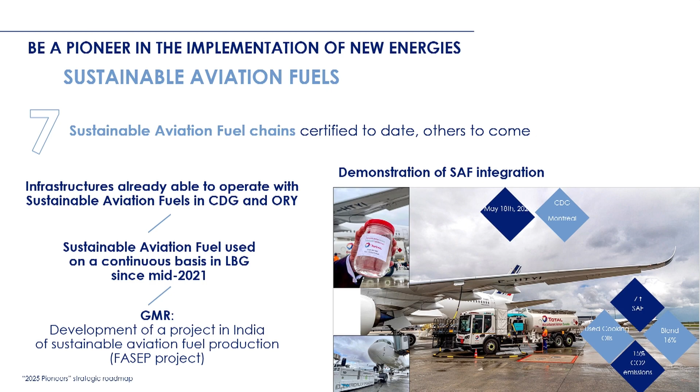In Le Bourget, we have installed several storages for SAF to supply our business jets. And once again, the airport has a role to play next to a SAF producer to secure or to foster the development of SAF, because we know it won't be so easy to have the amount of SAF required.

So GMR in India, since we're also implemented in India, just like Aéroport de Paris, we have developed a project of sustainable aviation fuel production, and Aéroport de Paris is also thinking about the role the airport has to play in the SAF value chain, to secure the production of SAF and to make sure that the amount of SAF produced will also be dedicated to our airport.

And in the Olga project mentioned by Mikko in the introduction, we are partnering with Air France, and we have experimented a flight with 16% blend of SAF in 2021 for a flight traveling to Montreal. On SAF, our role is really to be part of the value chain to foster the development of SAF.

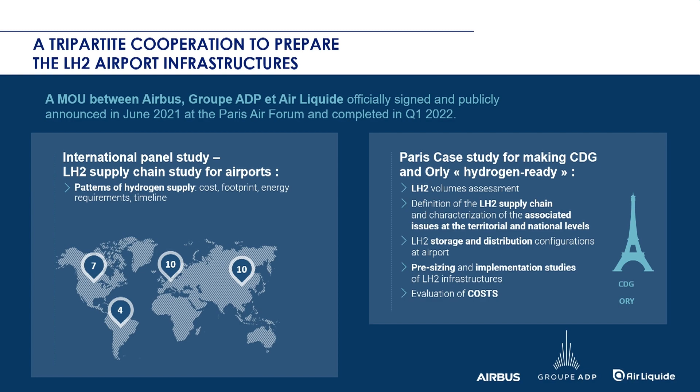With Airbus and Air Liquide, we led a cooperation to study what could be the hydrogen supply chain for 30 airports around the world, and also studied how to make CDG and Orly hydrogen ready. We carried out a master plan study, assessing the LH2 volume required, the possible supply chain, the way to store and distribute hydrogen, and also the cost.

Thanks to this study, we learned many interesting things. Maybe one of the most interesting at a European level is that the price of hydrogen will mostly depend on the price of electricity, whereas today the price of kerosene is quite the same all around the world. The price of hydrogen, because of the price of electricity, will vary a lot between countries.

So it could bring also a kind of unfair situation - the level playing field won't be the same anymore. The price of hydrogen will become a lever of competitiveness of airports. That's why airports should also tackle the subject by thinking about how they could play a role in the value chain of hydrogen, to be sure to have enough hydrogen, but also to have it at the lowest price possible, because it will be a lever of competitiveness.

During our study with Airbus and Air Liquide, we also studied how to implement hydrogen infrastructures on airports, and there will be several phases. The first phase, between 2035 - the entry into service of zero emission aircraft - and 2040, the supply chain will mostly rely on trucks.

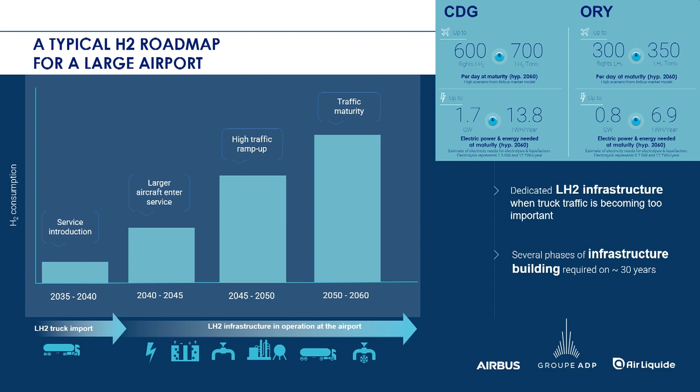There will be hydrogen farms or hydrogen producing farms located away from the airport, and trucks will supply the aircraft between these farms and the airport. As of 2040, we think liquefiers and hydrogen storage will be necessary at the airport, and the ramp up will follow progressively the penetration of hydrogen aircraft.

To distribute this hydrogen to airports, there will be two main possibilities, just like today with kerosene: the first is with trucks, and the second is with cryogenic pipelines. Just to give you an overview, for CDG and Orly, in one of the most optimistic scenarios, it could represent up to 700 tons of hydrogen per day required for Charles de Gaulle, which is enormous, and 350 tons of hydrogen per day in Orly.

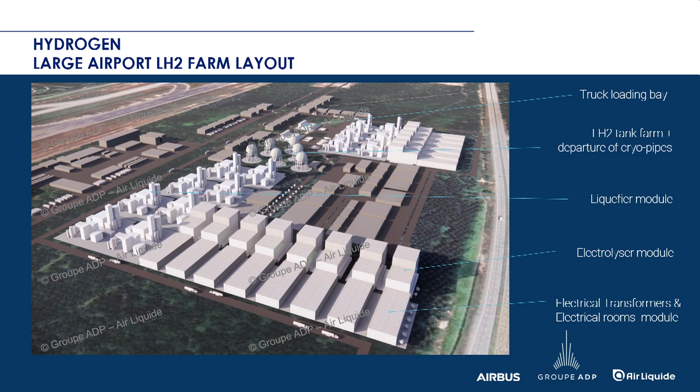And because we love master plans as an airport operator, we also tried to design a large airport hydrogen fuel farm, just to have an overview of what it could consist of. For big airports, it would require up to 20 hectares to implement hydrogen infrastructure, including liquefier storage, part of production, and a module to distribute hydrogen to the aircraft.

Here I presented the subject under the infrastructure angle, but we have also started to tackle it under a regulatory angle with Airbus. We really try to understand how hydrogen aircraft will impact actual regulation. We study all the aircraft process from landing to takeoff, and it's not so easy to define exactly what the change could be and how to tackle it from a regulatory point of view.

But we know that one of the keys to success for hydrogen will be to be ready in terms of regulation at airports, and we also know that we will need standards across Europe and all around the world about how to cope with new aircraft from a regulation point of view.

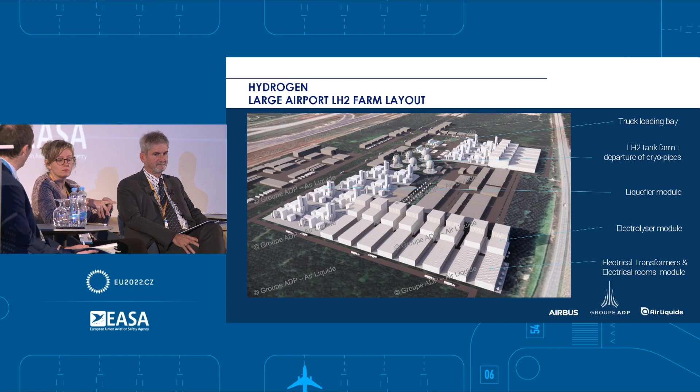Thank you, Blandine. Yeah, that's clear. So it's also encouraging to see that Group ADP is looking at short-term solutions with SAF, but really looking very detailed at hydrogen. And yeah, you were referring to the cooperation with Airbus, and that brings me to the next question, Peter.

Airbus is very ambitious, so by 2035, Airbus would like to bring to reality a hydrogen-powered aircraft. So yeah, of course, this is something you cannot do alone, and collaboration with airports is extremely necessary, as we just heard from Blandine.

But in general, how is Airbus getting ready for this in terms of your hydrogen plans, and what are you doing in collaboration to really achieve that point?

Okay, thank you very much, Dietmar. Really thank you for having this opportunity to share with you the challenges we have with this. It's always easier to climb a mountain together than to try to do it alone.

But before going to the challenges, I would like to spend one minute on the ZEROe project, because not everybody may know what this is all about. It is a project in Airbus we launched two years ago.

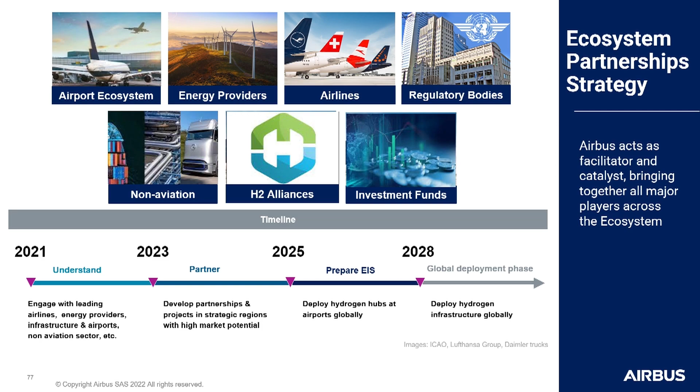And the objective is to build together a roadmap so that we can bring the introduction of hydrogen to a successful situation. This is very much linked to the time we introduce the aircraft, but also how much the network is going to develop. So it's really an interaction between the aircraft manufacturer, the operators, and the airport to find out how the traffic of hydrogen aircraft is going to develop on my airport.

So it's really detailed work which you have to do with each airport. I think, well, you see here the main stakeholders, and as we are in an EASA conference, I think we should spend a little bit more time on the regulatory side. Blandine, you already mentioned this is a big challenge. There is not much in terms of regulatory today existing.

And we have the situation where we're not only looking at aviation regulation, which is typically what we deal with, but as we are now with an airport, we need to look at the supply of hydrogen to the airport. We're looking at all the regulation also on the civil side.

So we started from the bottom. We set up in France a working group where, together with all the stakeholders, the regulators, aviation and civil, we started to look at what kind of new risks we are introducing with this kind of hydrogen operation. And we have set up a matrix for that. It's just the first step. The next steps will be how are we going to mitigate those risks.

And following this, I think we can come up with the right recommendations and regulations to make sure that those risks are well managed in the world.

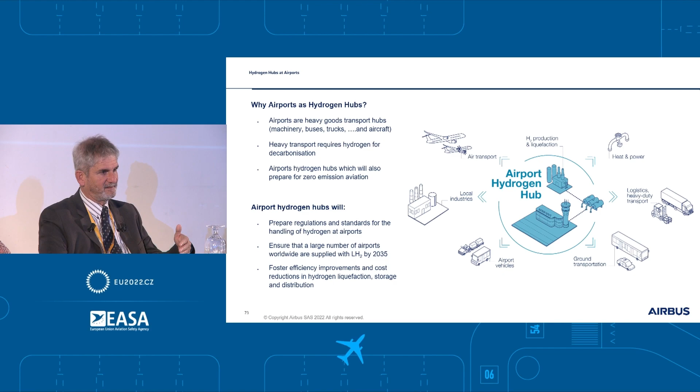And at a certain point in time, you will see that it is more efficient to supply liquid hydrogen to an airport and store it, even if you have only gaseous users. And we believe with this kind of development of users, we will be in time in 2035 to have liquid hydrogen actually available on the airport.

So this is how we are planning, together with all the stakeholders, to get the world ready by the time we come with these aircraft.

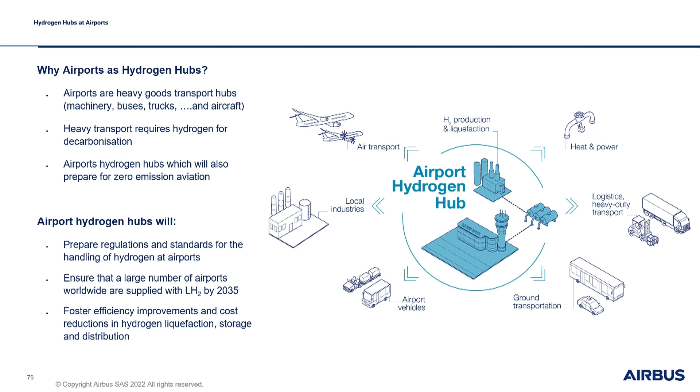Thank you, Peter. It's really challenging. 2035 — it seems like a long way, but it's not. Well, regulatory-wise, we all know it takes a lot of time to get the right regulation on the table. Which is why we are here today, and why we should indeed talk about that. You're right. So thank you.

Mikko, maybe — we talked a bit now about SAF and hydrogen and what airports can do, but let's take a step back and look at what airports themselves can do. This is also important. What is your view on how Finavia is approaching net zero carbon emissions from its own operations, and how does Finavia tackle that?

Yes, thank you. Indeed, we have a roadmap for net zero carbon in place, but let's first have a look at the airport network we have in Finland. It's a big country, with 20 airports run under one company.

Distance from Helsinki to Ivalo is 1 hour and 40 minutes. My flight from Helsinki here took something like 2 hours, so that gives an understanding of the distances in the north. You can guess that many of these airports are very small, only 2 flights a day. Well, in Lapland, much more, and Helsinki was plus 20 million before the pandemic.

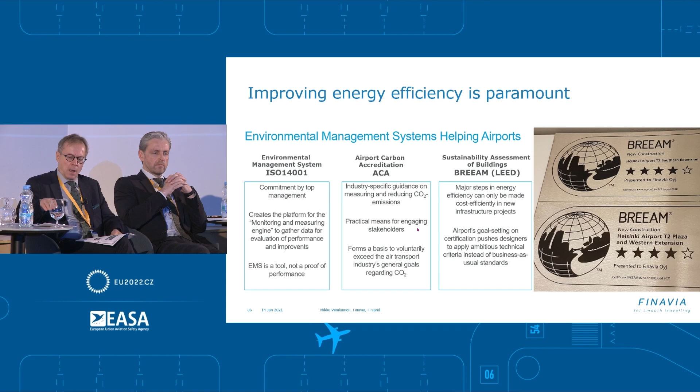Then we have reached in the ACA program, which has helped us a lot, level 4 plus in Helsinki airport and in Lapland airports. And we can say that at the moment we are carbon neutral, but that is not the goal. The goal is to be net zero carbon. But what do we need to do to reach that? Well, as said, get rid of fossil energy.

Vehicles and machinery will switch to renewables only if they run on piston engines. But before that, we electrify all the lighter vehicles. That is possible. But the big snow machines, you never make them run on batteries. They just can't cope with the power demand.

We have the opportunity to use renewable vehicle fuels provided by the oil company called Neste, whose representative sits here but talks about SAF today. We have the opportunity to distribute renewables to all of our airports throughout Finland. Heating goes to geothermal power, or we get, if that is not available, green thermal energy from the district heating systems,

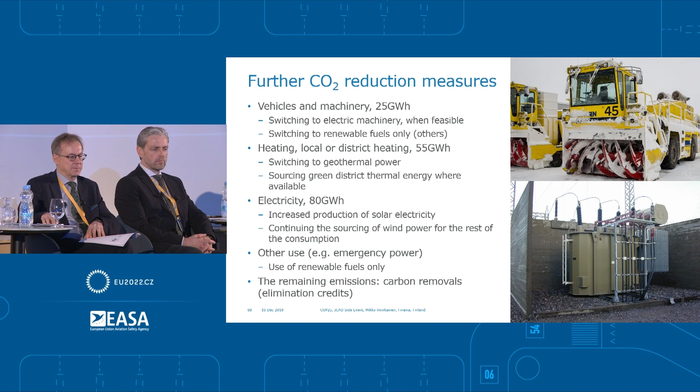which basically heat all the major airports and cities in Finland. They are turning green at a very fast pace. Electricity, we produce some solar electricity already ourselves today, but basically we continue sourcing all the electricity as green wind power also in the future. And all fuels we use will go to renewables bit by bit. We estimated that in 3 years' time we will have less than 200 tons of carbon

CO2 left, and that we will then eliminate with elimination credits and carbon capture and storage projects. So bit by bit, in 3 years, starting next year, we will implement these measures I just listed, and by the end of 2025, we wish to have airport carbon accreditation scheme level 5 for the full airport network, certifying that we have reached the status of a zero carbon airport operator. Thank you.

So, we talked about zero emissions by 2050. Airports themselves will also have a very important role, and I think you clearly showed how Finavia is already very committed to that by having net zero emissions very soon.

So, Jan Petter, you work for the Norwegian CAA. Norway is also a country which may have interesting climate conditions and settings to facilitate maybe electric flights, hydrogen flights. But you also see it as important in Norway to collaborate. So what is your view on that collaboration in order to facilitate those energy sources at Norwegian airports or airports in general? Also, as Norway is an EASA member state, what is the role of the member state in this process of getting those airports ready for those renewable energy sources?

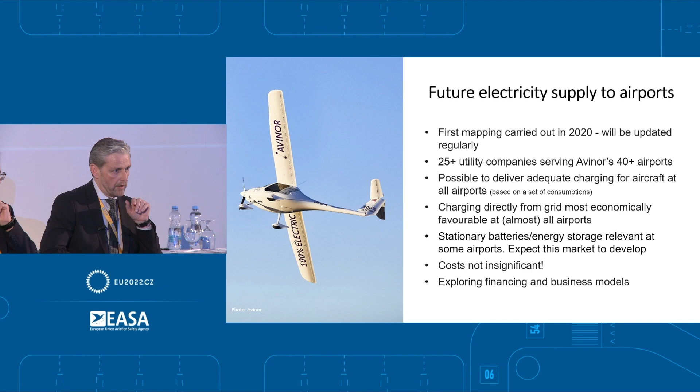Now, another interesting find is that in Norway we've been subsidizing electric cars quite heavily, so now we've passed this critical point. Today, 80% of all new cars are electrical. I think to a Norwegian family it's inconceivable to buy a fossil car for a normal family unless they have very specific needs, because now the range of the car is going far enough.

So actually, the situation at airports today is that all these cars wanting to charge, including rental cars, are maybe the biggest load factor right now. And of course, when you put aircraft on top of that for charging, that's the total sum of it. I expect this electric car development to proceed within Europe as well.

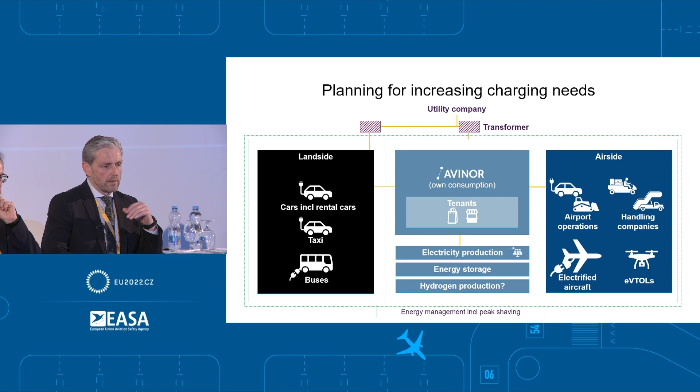They're also looking at energy storage needs on the airport. I'll show you a map shortly about hydrogen production. It could be an issue to produce hydrogen on the airport itself, since airports are often co-located with ship ports. And on the air side, there will be different utilities and eVTOLs needing charging.

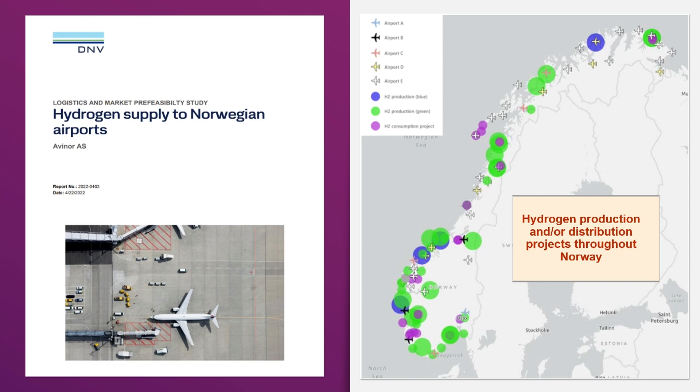So you talked about hydrogen, access to hydrogen. This is a report made just recently showing some of the network of hydrogen production. But there's a lot of work to be done to actually get this in use and also have the infrastructure on the airports.

Two words on SAF. Avinor, as a supplier or the airport owner, has supplied biofuels since 2014. We also see now that e-fuel production is being ramped up in Norway, very early stage, because I think e-fuel production efficiency needs to improve quite a lot. And then, of course, rather large advanced biojet fuel factories as well.

Now the last slide I have is this point you mentioned, Dietmar, on being an EASA member state. The first is about the safe development and integration of technology. I think we need to collaborate—not just EASA and one state, but several states—to see how we can support both the safe development and the integration of the technology. So that's one thing we need to collaborate on.

The other is actually providing guidance, providing basic aviation understanding and insights to all these new players in aviation—whether it's politicians, whether it's the energy sector not quite understanding what is happening, or whether it's startups with brilliant new ideas but they maybe spend two or three years before they actually understand aviation.

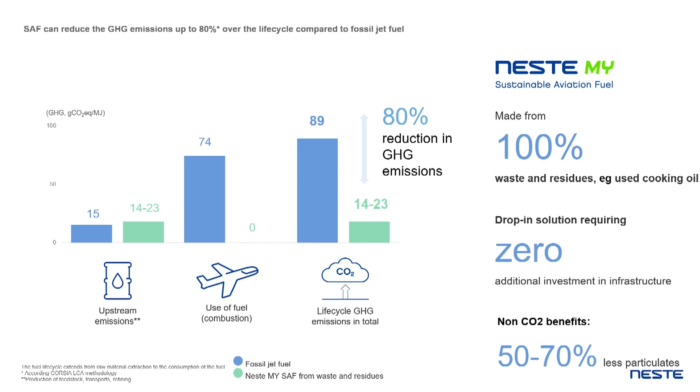There's more research being undertaken with organizations like Airbus to prove this out further. But in fact, the climate change benefit is probably underestimated because of these reduced particulate emissions, which have not only a benefit from a non-CO2 point of view, but also in other emissions around the airport.

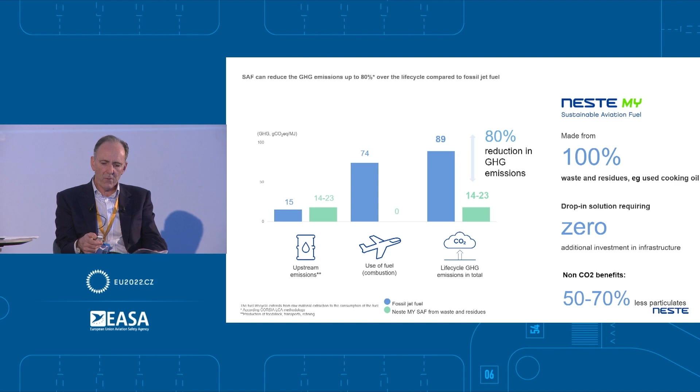And so, in effect, what we're doing, because we're recycling carbon that's in the ecosystem, we've got, as this graph shows, about an 80% reduction using CORSIA methodology versus the fossil fuel option. So there you see it visually, in case you didn't believe the research and stats on this.

And as I said, this is a drop-in solution that can be brought to the airports without any change to infrastructure. Yes, there's a huge investment in sourcing the raw materials, which is not easy. It's much easier, quite frankly, to dig a whacking great big hole in the ground and have hundreds of thousands of gallons pouring out. Here we have to source it from a very fragmented supply system, but that's quite costly. Then there's the investment in production facilities, and then we bring it together with fossil fuel into a blending and storage terminal, because right now it's only approved up to a 50% blend.

But as I say, I'm confident that we'll get to a stage where it's accepted up to 100%. From those blending and storage terminals, we then bring it to the airport into the refuelers and hydrants, so no change required. There's a rigorous certification and verification process, so we can track and it's audited what raw materials we've used, and hence what carbon saving we're achieving versus the fossil fuel equivalent.

The point to make here is you don't need to have blending at the airport, and quite frankly many airports don't have the space, especially the larger commercial airports. It's quite costly to have dedicated tanks. So what we do is blend it and then recertify it as Jet A1, and put it in the pipes and the railway and road systems to bring to airport.

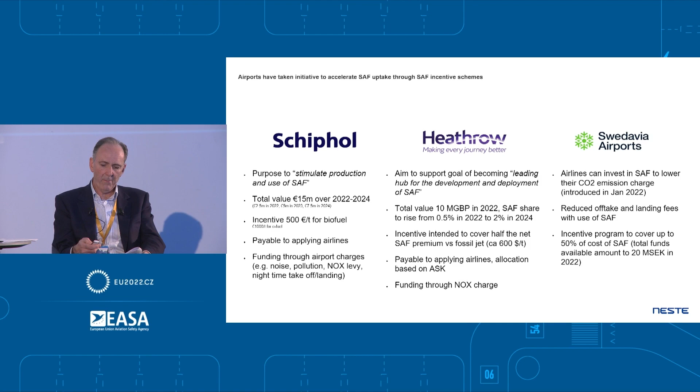So in short, we're on the runway and we're moving, we're working together. It's going to be a long journey requiring billions and billions of dollars, but the airports have a definite role to help the policy discussions, help potentially promote with incentive schemes, but have already been, as we've heard from the stories already, playing a fundamental role in getting this going.

Thank you, Jonathan, and really impressive that you're able to deliver the amounts of SAF demanded by the proposed RefuelEU legislation. So that's really encouraging to hear that it will be possible. So we're nearing almost the point where we can have some questions and answers via Slido.

But maybe before we go to that point, maybe a question for all the panelists. What should policymakers and regulators do in order to help the airports to be ready for the new energy sources? We've touched upon it already a bit, but maybe Mikko, if I can start with you, what would be your view? What kind of policy would be needed, if not yet there, to help the community?

Okay, thank you, Dietmar. Well, let me touch policies, but also starting with regulations and standards. What is great is the enthusiasm around the future power sources for flight. It's great because that will mean that we have the future of flight in the next decades. However, at the moment, nobody knows the technologies and technicalities well enough to create the technology that we are all so interested and keen on. So what we would need in the first place is regulations and standards on the technology itself regarding safety and operations - what technology, how to use it, how to certify it, how to get it in the sky.